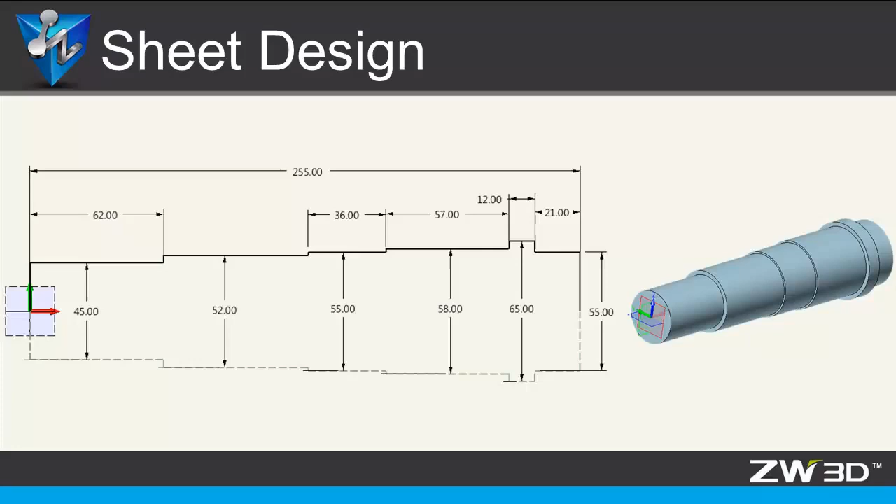Create a new file and name it Shaft. Right-click, then Insert a sketch. Pick the XY datum to draw the sketch.

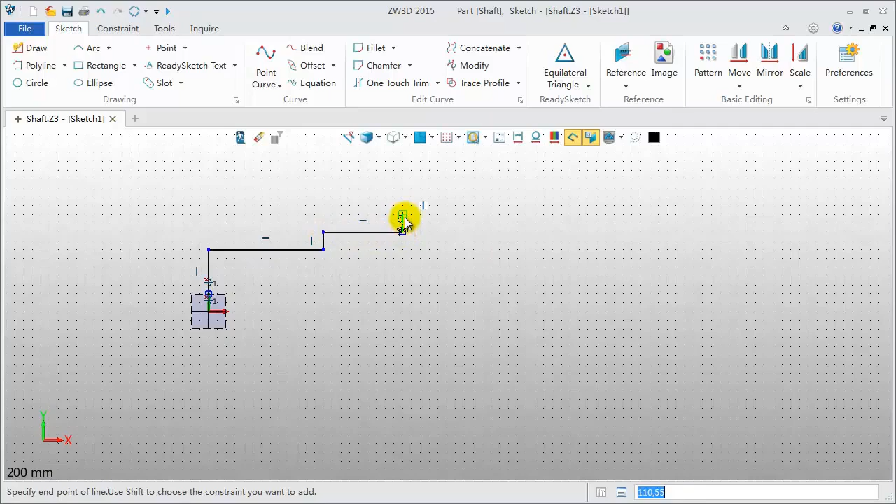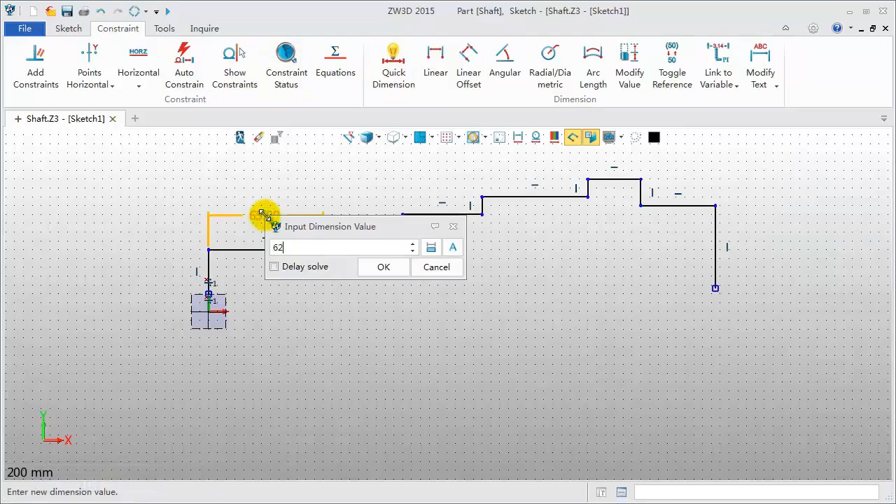Next, add dimension with the Quick Dimension tool. The first horizontal line is 62 millimeters. The third is 36 millimeters. The fourth is 57 millimeters.

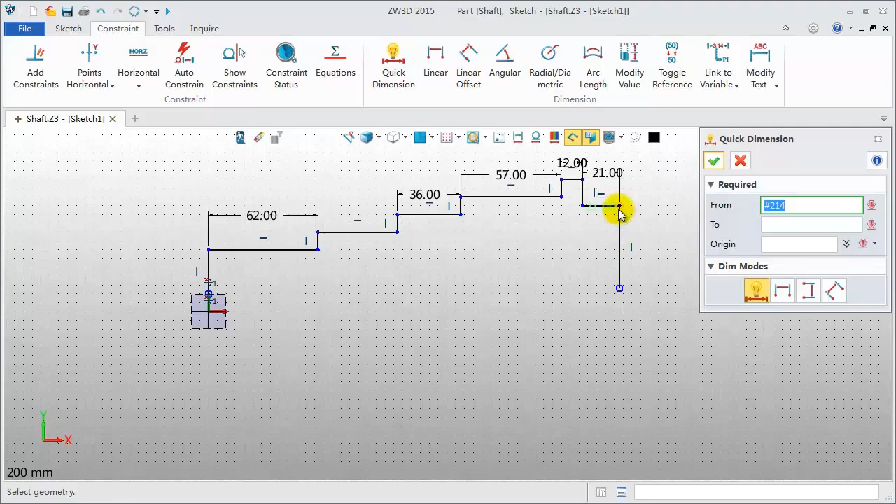The fifth is 12 millimeters. The sixth is 21 millimeters. The whole length is 255 millimeters.

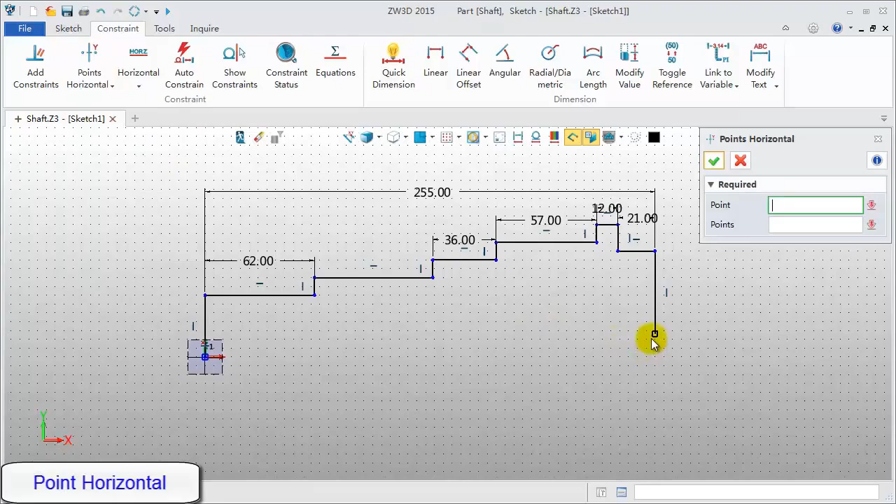Now, with the Point Coincident tool, fix the endpoint of the first vertical line to the original point. Add the horizontal constraint for the endpoints of two vertical lines.

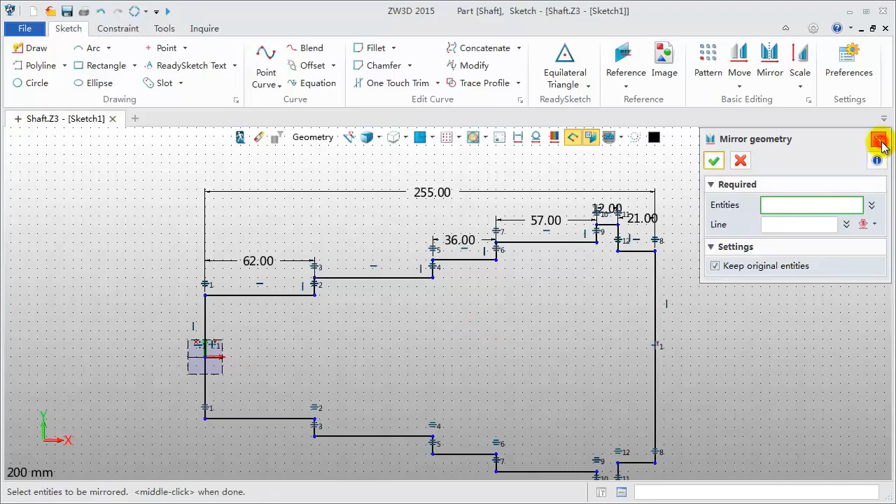Next, mirror the polyline on the x-axis. Click Mirror, window pick all lines, pick the x-axis, turn off the dimension and constraints for the clean sketch.

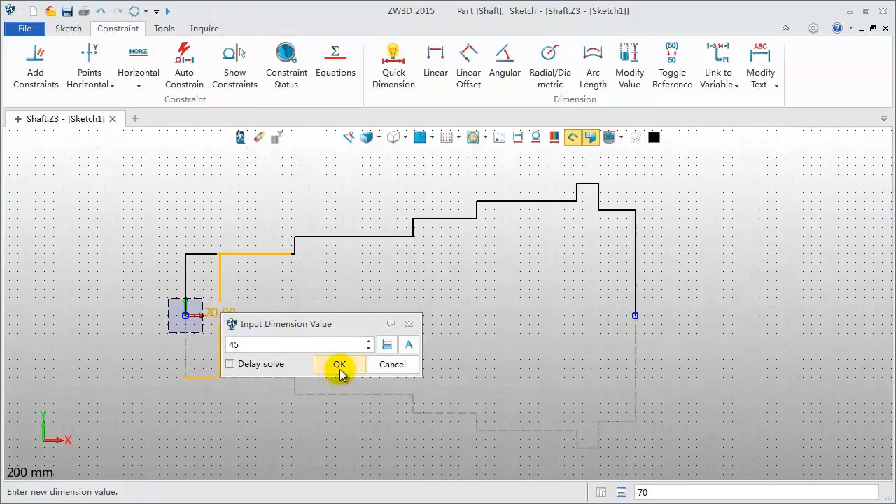Convert the mirrored polyline into construction lines. Then, we can add vertical dimensions. First one, 45 millimeters. Do them one by one.

Now, all vertical dimensions are finished. Turn on the color, dimension, and constraints to check again. Sketch is well defined.

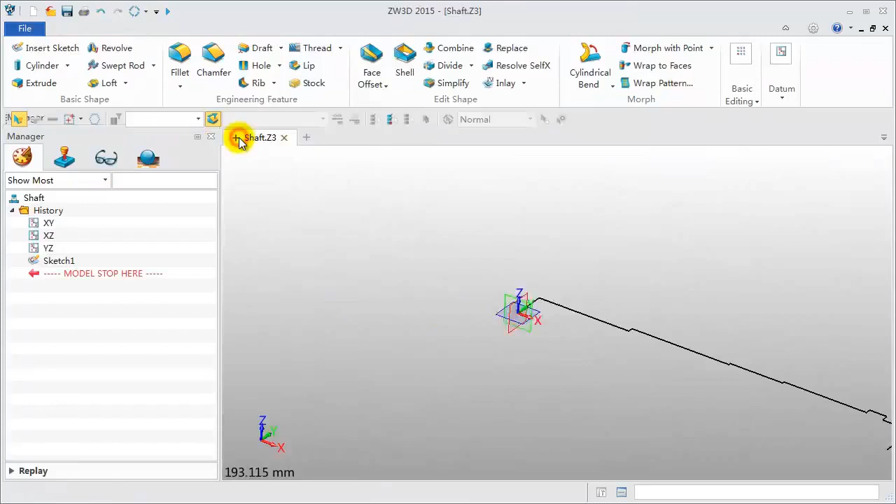Exit the sketch environment back to modeling. Revolve the sketch to get a shape.